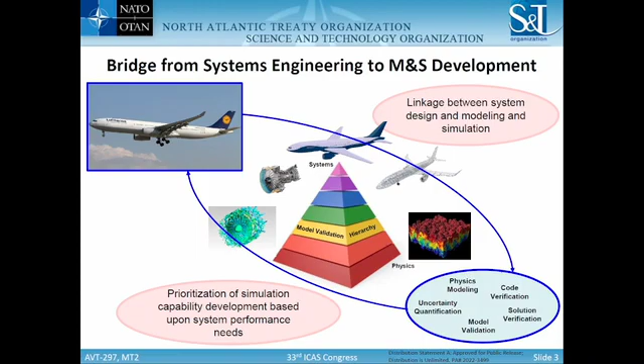So the validation hierarchy is one way to do this, where the linkage between the system design and the modeling and simulation is established. Of equal and possibly more importance is the prioritization of simulation capability development, and that's based on the system performance needs. So we're not putting these together for everything and anything that might ever happen. This is targeted work based on some system need that's got to be addressed, usually on a fixed time frame and budget.

So this is targeted work, as I said. The systems architecture and M&S linkages are established at the top. The systems design requirements focus is established at the top. Moving down the hierarchy corresponds to a deconstruction of element complexity. The sections of the hierarchy can have multiple tiers. The number of tiers is arbitrary, so you set that based on the problem you happen to be working.

Each tier can have multiple elements and sub-elements. You see some examples there of a couple elements on a tier, or one element that has a sub-element structure.

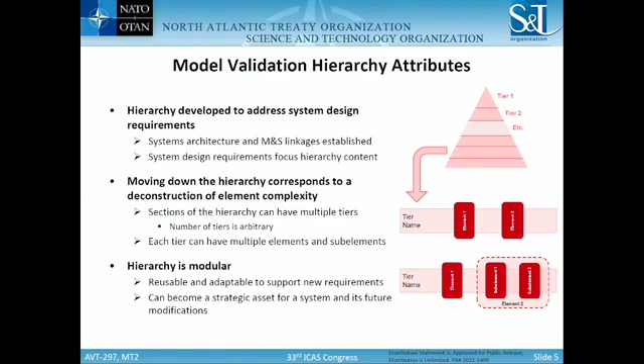We found that to be very advantageous to acknowledge just the way the physics are, and also to flatten the hierarchy. A final point that's very important is that this approach is modular. The hierarchy is reusable and adaptable to support new future requirements. It's put together, targeted based on some current requirement, but it can grow. You don't have to throw away what you've done. In this regard, it can become a strategic asset for a system and its future modifications.

Let's talk a little bit about conceptually the notional structure of the hierarchy.

Starting at the top, this shows the systems architecture. At the beginning, at the highest level, would be the systems architecture tier, which is usually a system of systems. We're going to look at how we drill down in the hierarchy, and I'm highlighting one element there with the blue outline for further analysis.

There can be any number of intermediate system tiers where you go from things like the full system, looking at the system, we identify some number of subsystems. This could continue on down as needed into components following traditional systems engineering thinking. But there will be a lowest systems architecture tier, and this will usually have a smaller number of tiers than you see in full systems engineering treatment, because the lowest tier is just what you need on that tier to introduce modeling, since this is a M&S, a model validation hierarchy.

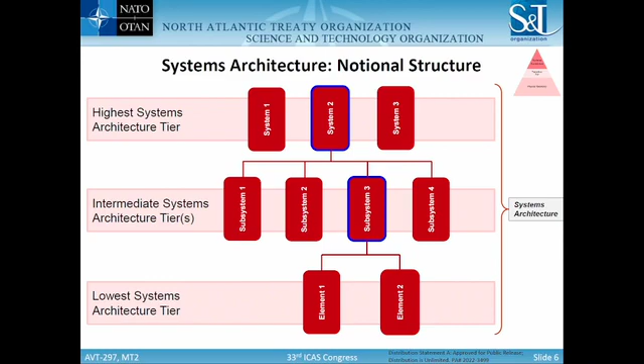This slide shows the notional construct of the transition tier. I'm highlighting one of the elements from the lowest systems architecture tier. At the next tier down, you see the transition tier, and this is where we show the element 1 modeling.

In this example, we allow for the possibility of there being, in this case, 3 disciplines that warrant separate modelings. Maybe one is fluid mechanics and one is solid mechanics. Each element would have its element modeling entry on the transition tier.

From the transition tier, if we look at the one modeling element that is circled there, I think that's discipline 2, we would start a physics taxonomy. I show the highest physics taxonomy tier. This would be where the most complex physics would reside for that particular sub-element on the transition tier, and there would be a taxonomy for each one of the entries on the transition tier.

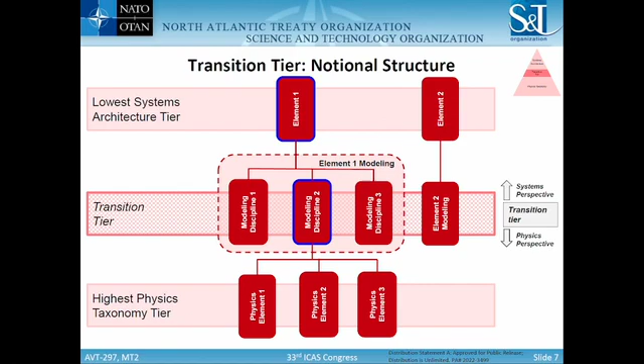Turning to the physics taxonomy notional structure at the bottom of the hierarchy, I've repeated the highest physics taxonomy tier. You can think of the most complex flows or the most complex electromagnetic interactions. We can pick one of those elements, and that will be primed.

That's demonstrated now at an intermediate physics taxonomy tier. This is where you start the physics-based deconstruction of the complex physics into intermediate level physics. There will be a number of these tiers which are problem dependent.

When you finally get to the lowest physics taxonomy tier, this is where your unit problems would show up. From my perspective, being an aerodynamicist, the unit problems, this is where we see things like a boundary layer on a flat plate, maybe with an oblique shock reflecting, things of that nature.

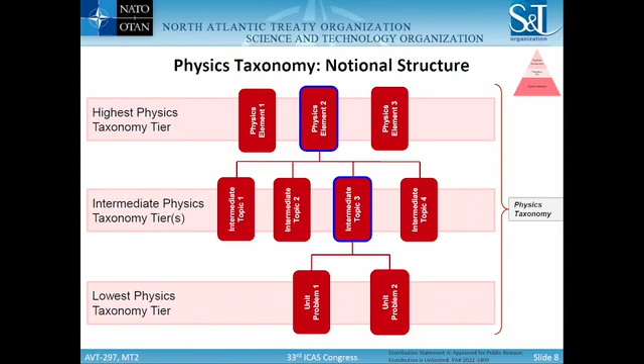The key thing is that all of this is connected explicitly from the full system down to the unit problems in the vertical direction through the model validation hierarchy.

There's another new concept that we developed in the course of doing this work in support of Joe's project, and that's the coupling element. Everybody knows that systems and subsystems are coupled, and really it's the coupled issues that can be quite challenging in this business of making viable airframes. For the model validation hierarchy, we introduced this notion of a coupling concept, shown as the diamond on the transition tier.

It's shown that it occurs between two element modelings. The one on the left has its physics taxonomy, the one on the right has its physics taxonomy, and the coupled modeling element would have its own physics taxonomy.

We've assessed this in many different ways in the NATO work. One way to think about it, even though this is a notional slide, if you thought of element 1 being an airframe, and you have airframe modeling in the transition tier, if element 2 were propulsion, you would have propulsion modeling on the right, and what would be in the middle is the propulsion airframe interaction modeling, PAI.

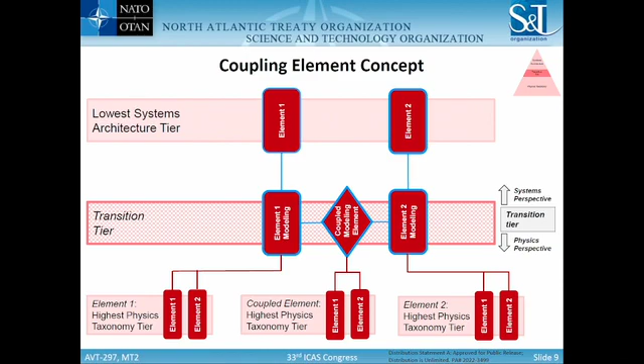PAI does specialized testing, they have specialized codes, they're going to have their own physics taxonomy, and it's connected in the lateral direction for a coupling element.

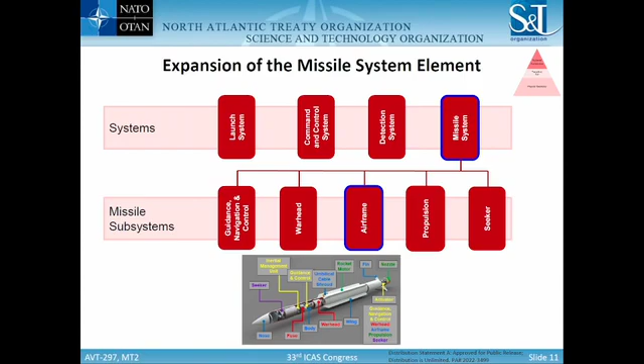Now in systems engineering, you would keep going, basically following the geometry and the parts. At some point, when you got to the bottom of that type of thinking, you've got washers, rivet counts, and things of that nature. We don't need to go that far. Actually, for a model validation hierarchy, you don't want to go that far. You only want to go down as far as you need to introduce the mathematical modeling. For this example, which is going to be based on aerodynamics, supersonic maneuver, this is all the further you need to go, because we're going to introduce modeling on the transition tier in the next chart, and we're going to focus on the missile.

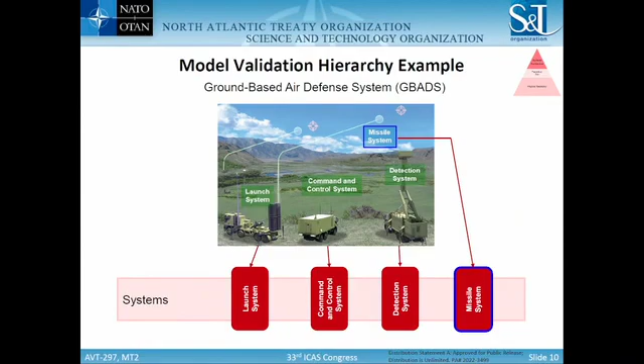Oops, I'm sorry, wrong button.

Okay, so for the missile, when we go to the transition tier, for the airframe, we're going to introduce airframe modeling. In this example, we have two disciplines to consider: aerodynamic modeling and structures modeling. This is fluid mechanics and solid mechanics. They'll each have their own physics taxonomy, and I'll show you a little bit about the aerodynamic modeling.

Here I've repeated the transition tier at the top with aerodynamic modeling, and I'm showing you what a physics taxonomy could look like for this application. For very complex flows, it's common practice in the aerodynamics community to consider the fundamental structures that we see in flows: shock waves, vortices, boundary layers, wakes, and jets. So we just chose that as the organizing principle for the complex flows for the aerodynamic modeling.

It's also common to have interest in unit interactions, how vortices interact with boundary layers, and so forth, so I'm showing that as a second application. Notionally, you could think of the interest, since this work is all targeted, the interest is going to be, say, supersonic maneuver. And you know the way missiles are, if you remember the picture, there's vortices all over the place, and they play a key role in how the vehicle maneuvers. So we chose that as an example.

The unit interactions, below those you can typically find canonical cases, and so on and so forth. An important thing here is that we've actually put this physics taxonomy together based on the way aerodynamicists work, and with this approach to a model validation hierarchy, you can do that. We put together a structures modeling physics taxonomy, and it'll be in the NATO reporting, and that's put together the way the structures discipline works. So this approach embraces the way the different discipline areas do their job, and we think that's a real strength of what we've done here. Everybody gets to work the way they're accustomed to working, but we have an approach that gets that all connected in the context of the model validation hierarchy and up to system performance needs.

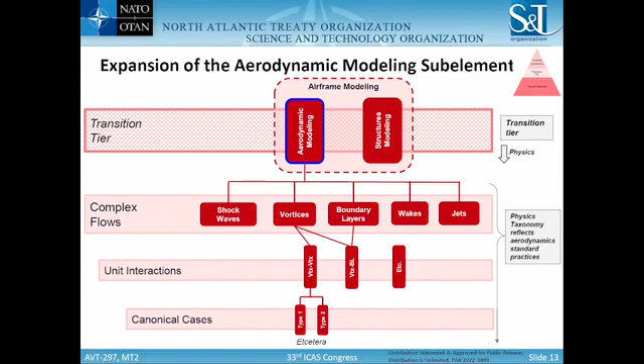Here's an example of coupling between the airframe modeling sub-elements. We've been focused on the airframe modeling. You see the aero modeling on the left, the structures modeling on the right. Each one of those would have their own physics taxonomy, as I've just mentioned. The diamond in this case shows the coupling between aerodynamics and structures, which we all know in this room is where aeroelasticity fits.

Aeroelasticity has its own discipline. It's going to have its own physics taxonomy, perhaps distinguishing static from dynamic. There are other ways to do it, specialized facilities and codes developed to address aeroelasticity. The point is that the coupling element is what enables these coupled interests to fit into this concept of a model validation hierarchy.

And we've worked this from all different levels. In the NATO report, we even have an example of coupling that originates from the system of systems level, between the launcher and the missile itself. You've got particulates and all sorts of different physics that show up. It doesn't matter - so far, it seems like this new concept of the coupling element just works.

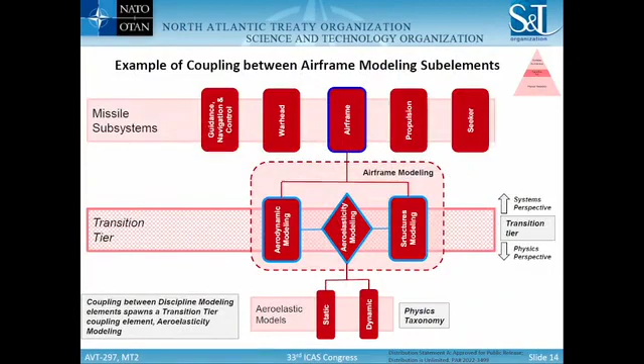Okay, so that's enough about the hierarchy itself. You've put this hierarchy together, targeted to address some system performance need that a program manager, say, is responsible for responding to. The next step, since you have the hierarchy, is to prioritize what's in it, so that you end up doing what will be the best work to address whatever the need is.

We've talked about creating the hierarchy itself. The prioritization here I'm showing has four elements. You create the hierarchy based on system needs. We next have created something we call a hierarchy element prioritization, or HELP table. This is where prioritization is done based on the importance of a particular validation hierarchy element to some system response quantity. Next, there's the creation of a gap analysis.

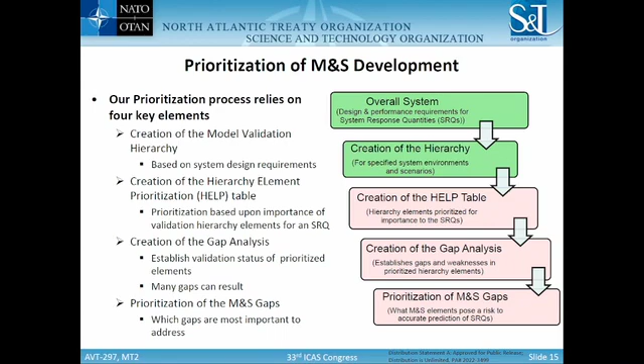This is where we establish the validation status for the various prioritized elements, and there can be a lot of them. So the final step is to prioritize those gaps - which ones are most important to work for the question that's on the table? And I'm going to summarize these a little bit.

For the HELP table, this shares a common philosophy with a prior process known as the Phenomena Identification and Ranking Table, or PIRT. PIRTs have been around a long time, and it's been my experience that not a lot of people in our business, in the aero business, are aware of this. PIRTs actually came out of the nuclear power safety side of the house.

They use M&S to help assure the safety of nuclear power plants, and they developed something called a PIRT to help guide their analysis and pick out what parts of their M&S are most important. We found that we could leverage almost all of the PIRT for our interests in terms of a model validation hierarchy. And there are four key features to the HELP table.

An environment and scenario under analysis are stipulated. For us, you could think of the environment as, say, normal operating conditions, and for the scenario, think about supersonic maneuver of this missile. You stipulate whatever it is that you're working on. There's a list of the hierarchy elements for assessment that are germane to that particular environment and scenario, listed there as A through F - those would be like vortex flows or shock waves or things like that.

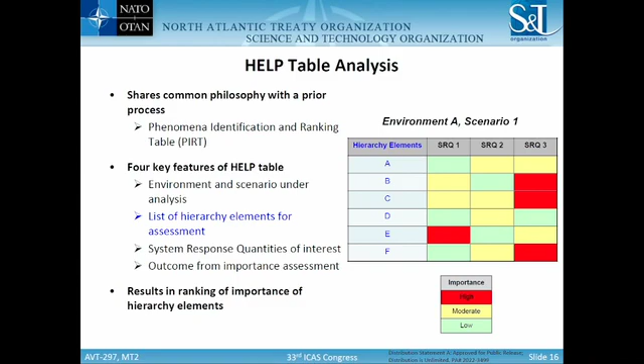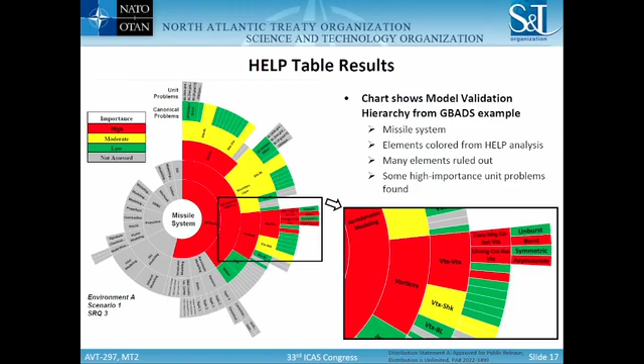So you can get a pretty quick snapshot of what the help table looks like. And you can see that out of what could be a lot of unit problems, you can narrow this down pretty quick to find the ones that seem to be important.

Next, the gap analysis is done. This also shares common philosophy with the prior process. The fellows that did the PIRT analysis did a gap analysis, and we found once again that we could leverage just about all of their work. It's been around for a while. There are just a few changes that we had to make to plug in the model validation hierarchy to their thinking.

5 key features. Each environment and scenario is stipulated across the top. I meant the supersonic maneuver. This is for SRQ3, say the rolling moment coefficient.

There's been a down select for the subset of the model validation hierarchy elements from the help table, so we only have 4 shown here. And then going across the top are the standard items that we need to assess the status of: the modeling, verification, validation, UQ.

And here we're assessing what do we know about our capability? Is it inadequate, unknown, or adequate? This starts to give you, for the targeted flow physics, what are the aspects of the simulation that you need to go after. Do you just need to get some verification done? Do you need to do a validation test? Maybe everything's okay and you just need to do some UQ.

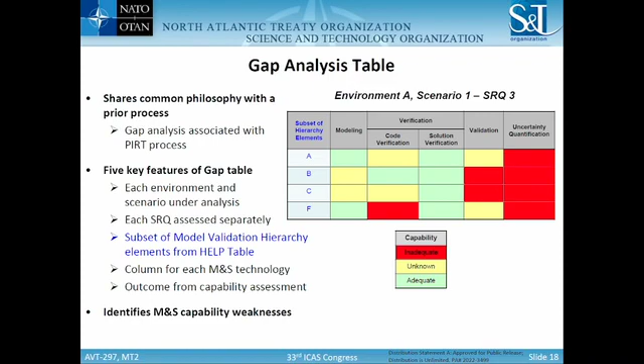So this identifies the M&S capability weaknesses. And then, of course, the next step is closing those gaps. These gap findings, the analysis identifies the high priority M&S elements, and the M&S elements themselves connect all the way back up to the top to the system design requirements. At least in my way of thinking, this is the point that you would probably report back to your program manager with what you've done, what you found.

There are going to be groups of SMEs, subject matter experts, that have helped you get to this point. And you can actually lay the whole thing out so that collectively you make a decision of what work is the most important to do. How does the schedule fit with the program needs? And do we have the money to do the right job? That can be a collective decision.

With the decisions made, gap closure work is pretty much the standard stuff: model validation experiments, improved numerical simulations, etc. And the gap closure impacts, the first one there is, I would also say, is fairly common.

Gap closure provides the enhanced M&S confidence at the level of the hierarchy that you worked at. Maybe that goes without saying, but I think you need to say it. The other thing, though, is that the model validation hierarchy could broaden the impact of this gap closure work that you did. Down at the bottom, the physics taxonomy,

it's got a lot of closely related physics right around the particular topic that you used. So you could be able to do a more well thought out assessment of the new technology, maybe a better turbulence model. You could look for changes in emergent properties. You could do a much more informed physics assessment of the new work.

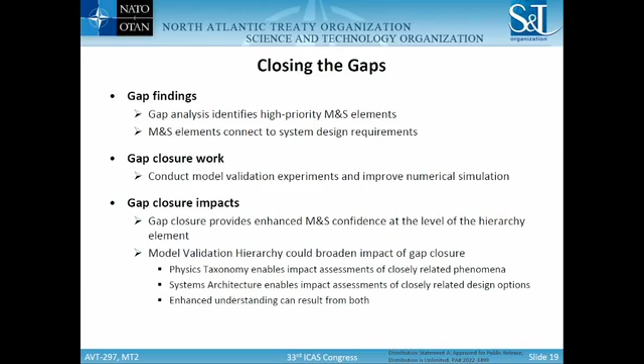At the top end, the systems architecture could enable impact assessments of closely related design options, which is more of a practical configuration level assessment of whatever this new turbulence model does. And it seemed to us, at least, that this could really enhance the understanding of what you did in this targeted piece of validation work.

So I think we can get more bang for the buck by exploiting the hierarchy in the ways I've described. Okay, concluding remarks.

This has been a significant extension to the model validation hierarchy that we developed. Bill was on our team. When you go back and read his book and look at the earlier charts, the basic ideas were there, but we've taken this quite a bit farther than what he published and others.

It's built on the general concept of deconstruction of complex systems. This allows system design requirements to be systematically connected with physics-based model validation features. And I think that's really important. You want to do this work on things that count, things that are important to the overall system and to the program managers you work with.

It connects systems architecture and physics taxonomy through a transition tier. That's something new. It accommodates coupling effects—also new. It accommodates discipline-specific conventions and practices, and I think that's critical. If you didn't do that, I don't think it would be used.

And this is robust. It can be applied to air, land, sea—I should have had space on there too—systems with diverse physics. I talk in terms of fluid mechanics and aerodynamics, but you can talk about anything. We could be doing electromagnetics, or space radiation on a capsule.

It doesn't matter. And to repeat a key point, this approach is modular. You start out putting a model validation hierarchy together to solve a specific interest for a specific problem, a specific program, a specific program manager, but you can reuse what you've got and just keep building it.

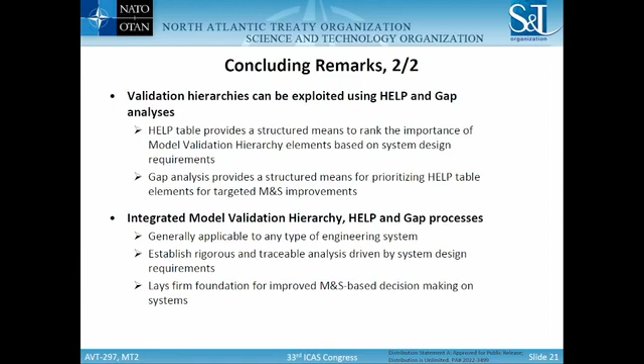The integrated model validation hierarchy, help, and gap processes are generally applicable to any type of engineering system. They establish rigorous and traceable analysis driven by system design requirements, and they lay a firm foundation for improved M&S-based decision-making on systems.

I'm going to go like one minute over because I can't leave acknowledgments out. You don't do work in a vacuum, and we've had diverse sponsorship for this work that's gone on for about 5 years. You see two NASA programs, the Transformational Tools and Technologies, and Advanced Air Transport Systems. We had a research branch.

We got support from the Air Force and from the NATO Science and Technology Organization. The call-outs—the most important one is to T-Cubed, as we call it. T-Cubed helped fund Bill Oberkampf. They supported my time to do this research, and they supported my ability to stand here, to come to this meeting and tell you about this work. Without T-Cubed, this would not have existed, and I appreciate the support we got through them very, very much.

Money and manpower is always tough. The Air Force Research Lab also funded Bill. We've had critical reviews from Jack Benek on this work. And of course, the NATO STO organization enabled the scientific collaboration for this project. So thank you—I'm about one minute fifteen over, but I appreciate it.

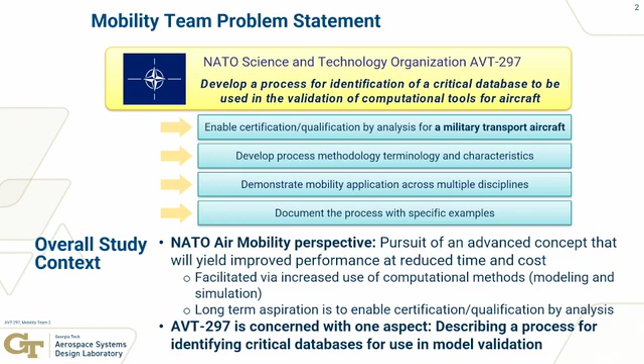Since we had to take a systems level perspective - and the reason for that is very obvious - sometimes something seems very important until you roll it up to the level of consequence, only to realize it was insignificant. The higher fidelity you build into those areas, the more complicated you make the problem. If you think of design, that's why we have conceptual design, preliminary design, and detailed design. A rib can easily have a million different permutations of just the rib itself, but I don't want to do that for every part, so I'm abstracting it as I'm moving up.

For instance, for a vehicle like this, I might be interested in: does it meet its range requirements? Is it free of flutter in the operational envelope, like Rob was presenting this morning with the VN diagram? Does it meet the takeoff and field length requirements, and the like?

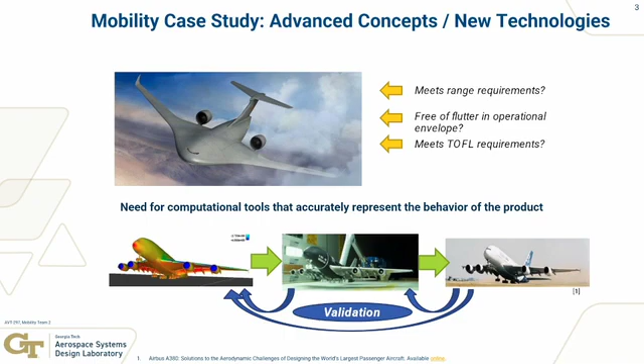Our portion of the exercise was the development and implementation of a methodology very similar to what Jim was presenting, that will contribute to the identification, quantification, and reduction - kind of like the UQ identified today - by certification by analysis as a desired state. In this case, what we're doing is trying to reduce epistemic uncertainty.

If the term is unfamiliar, uncertainty is usually classified under aleatory and epistemic. Aleatory is non-reducible, so usually you're talking about robust design and things of that nature. Epistemic uncertainty is more along the lines of lack of knowledge, which means the more I study the problem, the more iterations I do, the higher fidelity I go, eventually I have a chance of actually shrinking that distribution and de-risking a given problem.

The approach we took was founded in a model-based systems engineering approach. Of course, to do model-based, you have to do systems engineering, and all that is under the overall category of model-based engineering. It tries to draw on established engineering principles, because if they're not, people most likely will not use it - it will be too foreign to the processes they use.

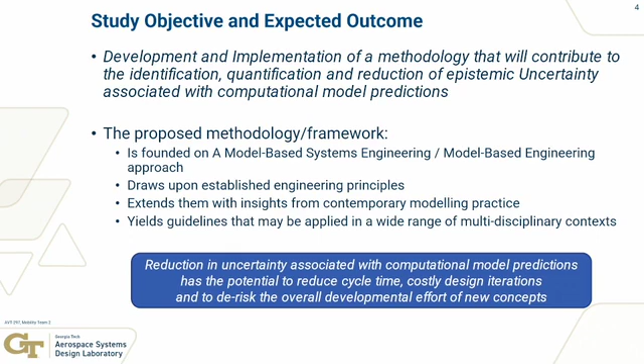And then it extends them with insights from contemporary modeling practices that, again, for people in the field are not particularly new, but if you've never seen them before, they might look novel. It yields guidelines that may be applied in a wide variety of multidisciplinary contexts - reduction in uncertainty associated with computational model predictions for the purpose of reducing cycle time, reducing costly design iterations, and de-risking the overall development of these new concepts.

For this presentation, I'm going to break it down into 4 portions: the decomposition of the problem, very similar to the ontology - and in fact it was identified this morning as a needed element, those ontologies - the development of the models for the purpose of our exercise, and then how we propagate those uncertainties for the purpose of identifying which uncertainties are the key ones to work on.

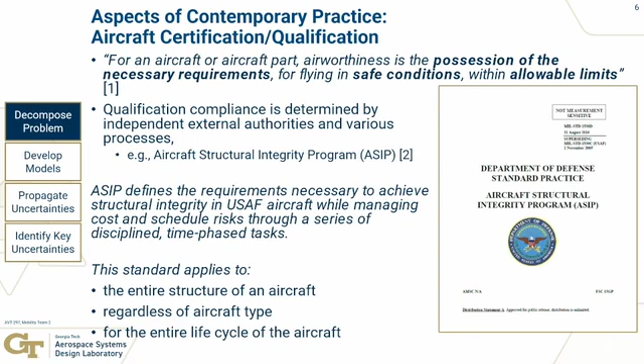So in this case, I'm using an example, the ASIP process for certification of aircraft. This is the Aircraft Structural Integrity Program. There is a document that describes the entire process. So from that document, I'm taking out the phases, the primary tasks that one has to perform to demonstrate that the vehicle is meeting the various criteria.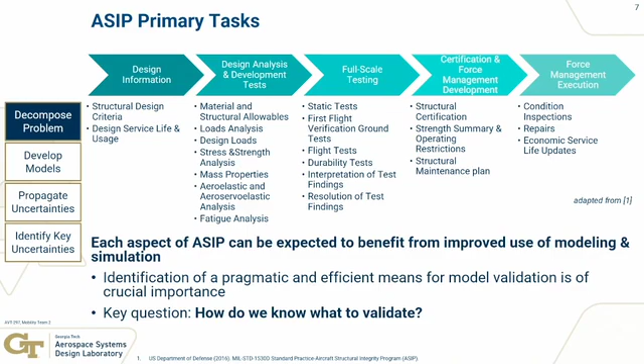So for each and every one of those things, I can either go and do the actual testing, or I can do some kind of an analysis. And before I commit to anything like this, I need to know whether the physics of the problem are well understood in order for me to do the analysis and de-risk the program. It's only when I feel that the analysis is not founded in the physics of the problem, I start deciding if I'm going to go to higher fidelity or highest fidelity, or if I'm going to do any physical tests. So the idea there is to be motivated by this context.

I mentioned systems engineering. For those of you who have never done any work in systems engineering, think of it like I have a set of requirements, and I need to flow them down and allocate them. So in this case, the same approach can be used where the allocation is along the lines of what analysis has to be performed, at what level, what tools, how much fidelity I want to build in those tools, and so forth. And that allocation implies that I have some kind of a quantitative approach on trading options.

I can do it this way or that way, and in the end, I can determine which direction to take. The functional decomposition is also there because in some cases, I haven't done the problem, so I don't know how to physically decompose it. It's not a derivative. Maybe I haven't done this before. So it's not uncommon, especially when people claim that they're innovating, to do a functional decomposition and then synthesize to come up with architectures that will solve that problem.

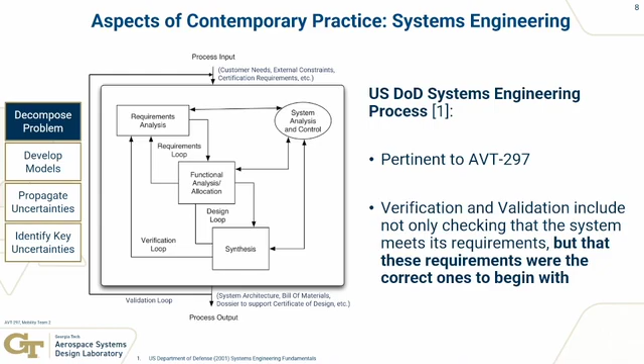So we left it open enough. As I said, it's a framework. A framework implies that the answer in the end is not a specific outcome or result. It is a place that has all the necessary hooks to do some use cases. The next person comes along, adds more use cases, and eventually you have a library that can do all of the above.

Now, Joe did mention, as he was giving a quick prelude of how the various teams were proceeding, our decomposition is very similar to Jim's. It's, of course, viewed a little bit different here in this diagram. But you always start with what it is that you're trying to do, identification of the requirements from the documents that I was just referring to. For example, for the example that we were talking, that was a relevant document.

And then in our case, we're going to break it down into a mission decomposition. Tell me what mission you're trying to perform and at what mission segment you are. That's one piece of information that you need.

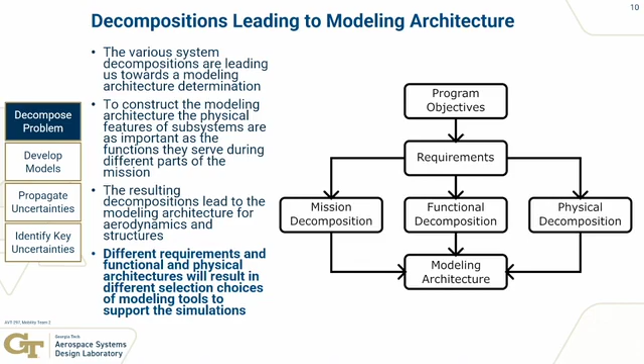If you think of your modeling, you always need some geometry, and you need conditions and so forth. The intent is to link it directly to those elements, so let me just show you side by side the two perspectives.

In the function decomposition, you have an arrangement of functions with sub-functions and interfaces. We decomposed this for the C5. At the bottom you see a mission profile—the idea is you move segment by segment, asking what am I doing at this step, what am I doing at this step.

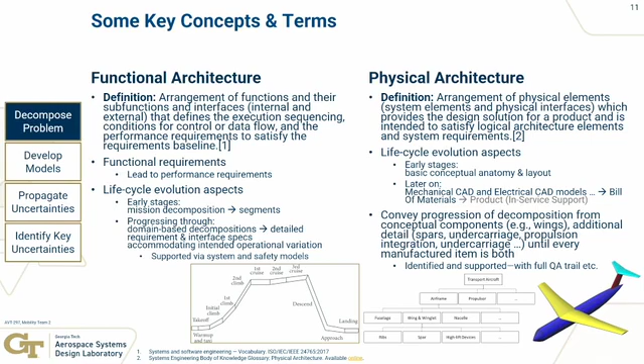And on the right-hand side, similar to what Jim was showing, we see a decomposition of a vehicle. In this case it has the elements of a transport cargo type of military asset, so it looks like a C5.

Then you go into the overall decomposition of the problem, similar to the taxonomy that was shown. We also have a demarcation point—once you've done your decomposition a la systems engineering, now you need to think about the process, how will I analyze those things.

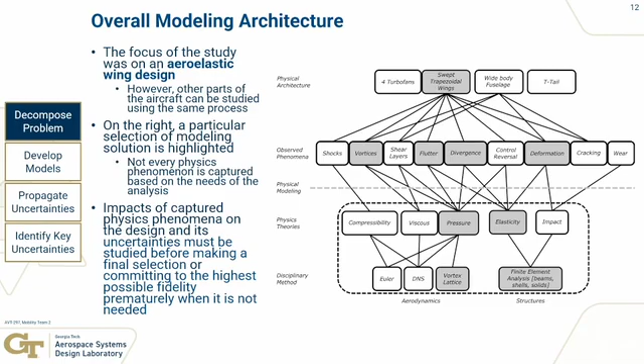At the top is the physics you're trying to capture as it pertains to a specific element. One level below, you have the disciplinary methods you might use, and one level below that, every entity codifies those into tools—a specific code preferred depending on the level of sophistication and the physics someone wants to use.

So to put it into use here, for the C5 model we're going to pick up a baseline C5—it's the C5A, a little bit older generation C5—and we're going to model it.

Within that modeling, we're going to build an environment for the purpose of quantifying uncertainties and propagating them. We're going to try to tackle what happens if you have couplings, like Jim was saying—if you have a coupling between aero and structures, what will that do to the answer, what does that do to my remaining uncertainty and the like.

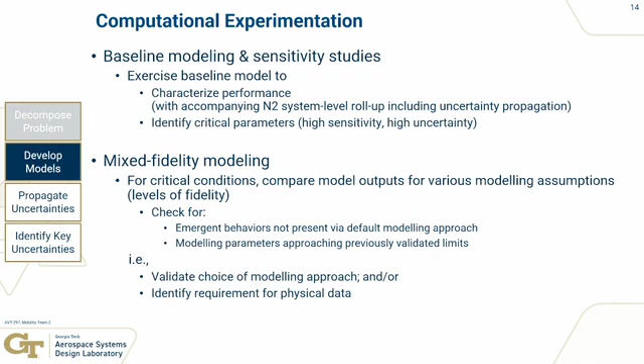The intent there is to try things of mixed fidelity modeling—if I had this coupled or not, if I include this analysis or not, do I have ways of quantifying what that impact will be. So you start by putting together a multidisciplinary analysis environment, starting with the mission, the geometry, and the various disciplines we tackled.

In principle the environment was integrated, so we could have done propulsion and other things, but in this case propulsion is uncoupled. Of course the airplane needs an engine, so there is the engine's model for the C5. Then we have the aero and structures, and the aeroelasticity is that coupling between the two—so the coupling between aero and structures gives us the aeroelasticity.

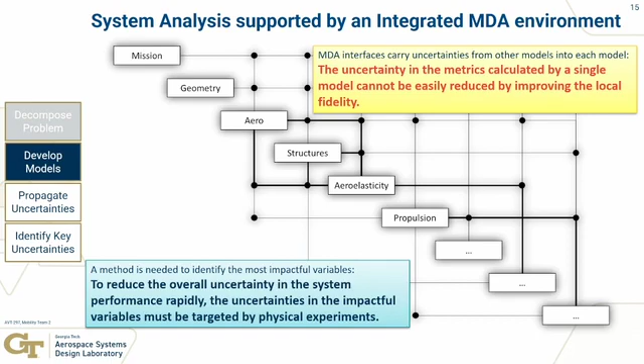We're trying to reduce the overall uncertainty in the system performance, and we want to see exactly how that happened—where did it come from, what were the contributions, and the like. So this n-squared diagram that we had before manifests itself into an integrated environment.

In this case we didn't have to start from scratch and stitch all our codes together—our lab has done this activity in support of other programs within the Air Force and NASA. The environment is called RAID, and it has a little depiction over there. Some elements are commercially available tools, others are homemade tools, and you have a geometry that you interface with all the tools.

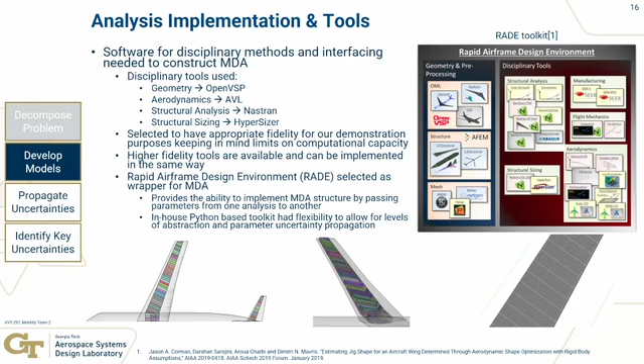In this case, I wouldn't say this is high fidelity—it's more mid-fidelity, just for demonstration purposes. The idea is that when you see something you don't believe is capturing the physics accurately, you drop down one level below in sophistication. That same n-squared diagram is then presented here as an XDSM, a design structure matrix, showing the information being exchanged between the various modules.

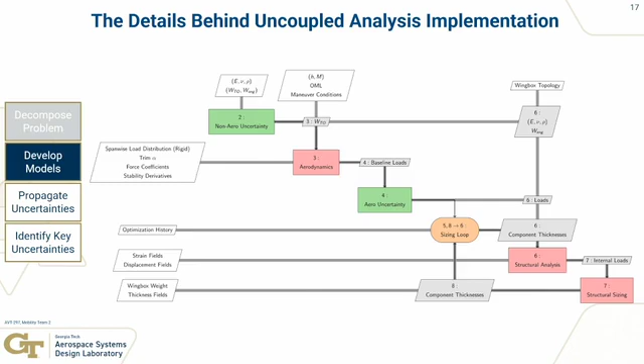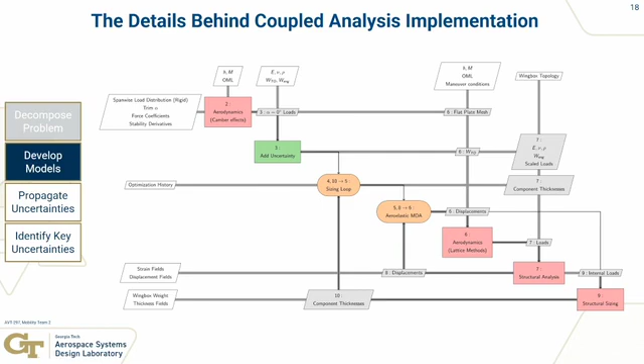In this case, it's the uncoupled one, where the aero and the structures are not coupled together. In the next one, they're actually coupled together, so you're accounting for the deflections and so forth. It was done both ways, and in the end we're going to try to see the impact that those things had. Then we went through a little verification just to make sure the models were working properly.

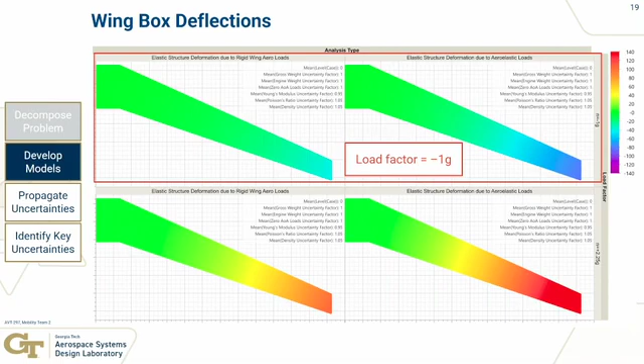So you have the wing box deflection for, in this case, minus 1G and 2.25 Gs. Then we did a design of experiments trying different conditions, testing the aeroelastic versus non-aeroelastic cases.

Once we felt we had enough of a model, we started structuring the framework to assess uncertainty, trying to find at what places you envision epistemic uncertainty entering. Early on, before you commit to the analysis, you can easily change the ranges of error from that analysis to see how sensitive the outcome will be, and that gives you guidance on how to proceed.

In trying to formulate it this way, we wanted to decide what the uncertainty parameters would be. Usually they're disciplinary metrics, and we needed a way of sampling it, driving towards doing some kind of probabilistic analysis on this.

Because these analyses tend to be rather cumbersome and take quite a bit of time to run, you want to speed up those processes. So the idea here is that you run a design of experiments around the integrated environment to generate the necessary data to surrogate it, creating surrogate models—either neural nets or some similar technique. Those surrogates are so fast to use that you can manipulate them very quickly to do either inverse design problems or probabilistics.

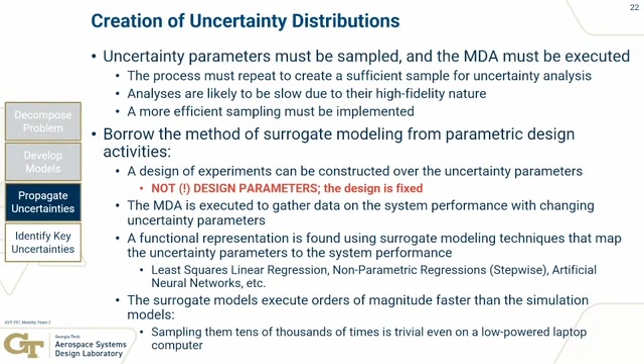The attempt here was to have an environment that the team can come together in, where someone can make a decision on the fly and see how the results differ. Also, sometimes because of the objectives, there's not just one objective—there are multiple objectives, and the weightings are not a priori known to the designer. You almost want to leave that degree of freedom to a review team that decides the emphasis they want to put on the various criteria. So it was built with that mentality in mind, that some kind of interactive parametric environment might be desired.

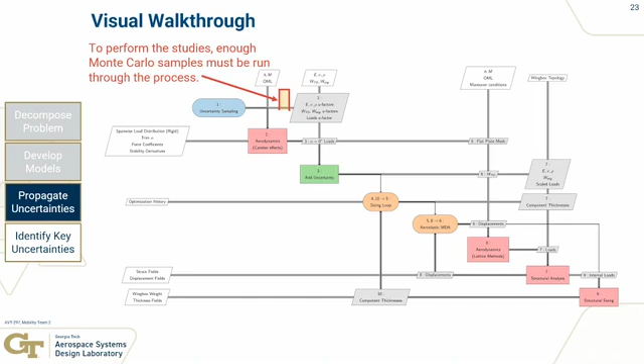So that's a visual walkthrough of how this is working. Here is our XDSM. I want to perform studies by sampling the range within which I'm varying a given process. The process takes a few hours to complete.

So if I had 1,000 samples per uncertainty factor, that would be about 2 years—of course, that's on a specific machine. If I had a cluster or cloud computing or whatever, it might be different, but just for reference purposes it gives you a perspective. And in many cases, 1,000 samples might be too little. If I'm interested in things in the tails of distributions, I might need hundreds of thousands or a million calculations.

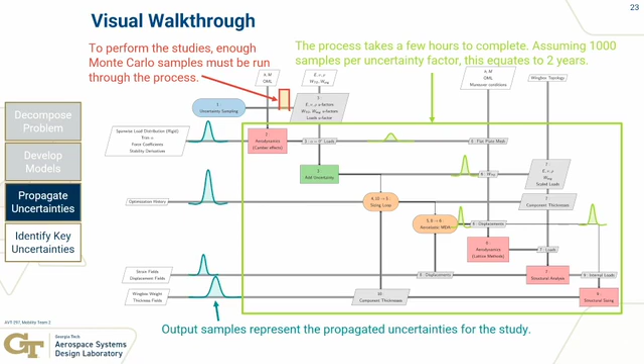So the idea is to propagate them through, and every time I have a feedback, now I have a probability on top of a probability. But the intent is, at every level, to figure out how much variability I'm getting from that step. So when Joe and Jim mentioned rolling it up to the system level, that's exactly what it is—I want to get to the point of consequence to find if those things really matter. And if they don't matter, even though I might have a 10% uncertainty, by the time I get to the top it might be 1%, so maybe I don't care about that 10%. I want to care about the ones where a small perturbation leads to great results.

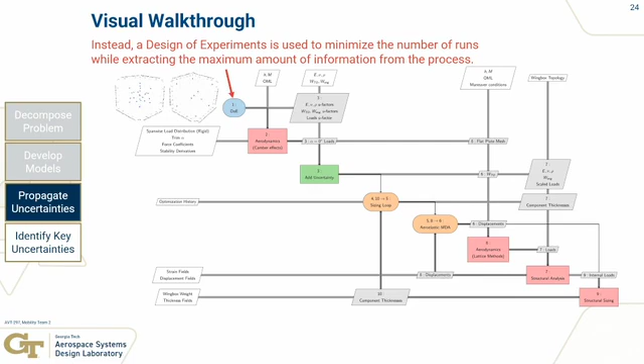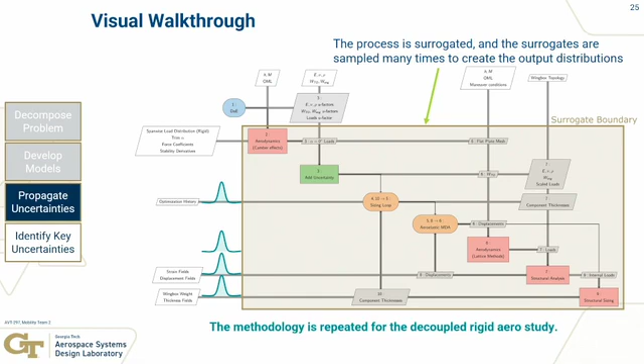So we did a design of experiments around that problem to speed up those processes. The Monte Carlo is actually done on surrogates rather than on the actual codes—imagine a design of experiments around the entire analysis. In this case, we tried a neural net representation for every response we were tracking and every constraint we were tracking. Then, with that capability, I can very quickly do a Monte Carlo and speed up those processes.

So now I have the framework running, and I have the surrogates so I can operate on, so I can see what kinds of results I can get.

Well, for starters, I can do parametric sensitivity. In this case, the horizontal rows are different things I'm tracking, and I can do this at every level. In fact, we're interlinking them so I can cascade them and look at them at every level. At the bottom, I have key parameters. These might not be geometries anymore, but disciplinary metrics that might have a little bit of a play.

Right now I'm showing it to you as a PowerPoint slide, but in reality this is something you put up on your laptop or project on a screen. Those hairlines, if you touch them and move them, it automatically updates the numbers on the vertical axis. So it's like a calculator.

And then of course it shows me the sensitivity. As I'm doing the sensitivity, it automatically shows that this is true when all the other variables are fixed at a given value. You fix the other values, and those things move up and down.

The first one has a little wiggle, which automatically tells me that something in my modeling didn't go well. So it's also a debugging tool of sorts. Someone mentioned today, I think it was Rob, that when you see some of your data, you realize that something wasn't working right. So this is another byproduct of the formulation, helping me debug those things.

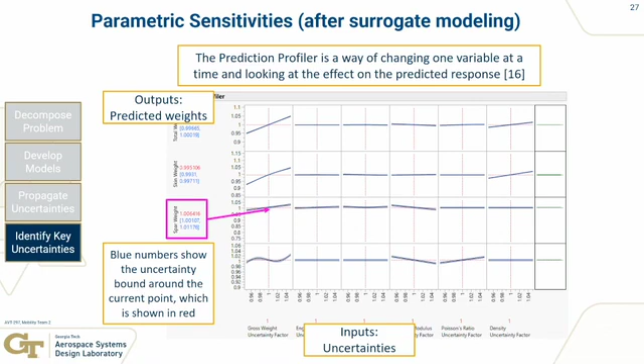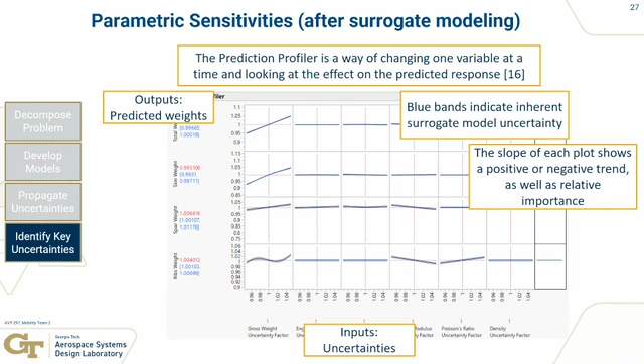So I have predicted results. The blue numbers show the uncertainty bound around the current point, so in a sense they're like 3 lines on top of each other, sometimes with error bars. It shows me how much error was introduced by the fact that I was creating a surrogate of a model, like a model of a model. The blue bands indicate this, and the slope of each plot shows a positive or negative trend, as well as a relative importance.

Once I have this formulation, I can drop down into a gallery of distributions. In this case, it shows a uniform distribution, meaning I'm a little bit agnostic as to whether there's a central tendency or bias in the shape function. So uniform distribution is almost like a random number generator within that range.

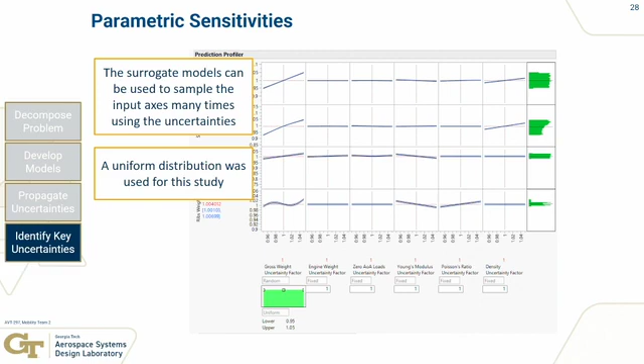Then literally you run 10,000 cases just by snapping your finger, and you get the probability distributions on the right-hand side. That's a sense of how much uncertainty, in this case for this example, one thing is varying while the other things are fixed at values.

Then I can come in and say, okay, if it's not a uniform distribution, what is it? Do I have any prior knowledge of this thing from prior investigations? You change on the fly what that shape function is going to be. And of course, in this case, we're just doing 1-to-1. I can change the values of the other ones to bracket the whole thing.

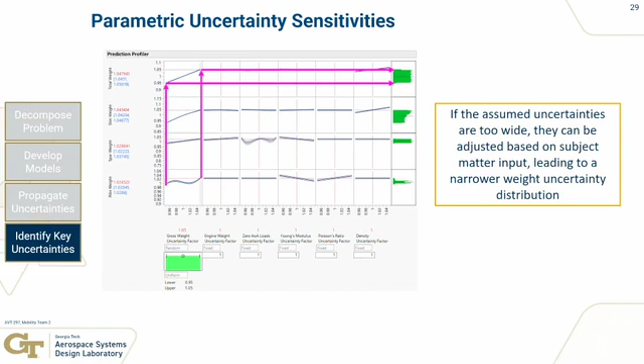If the uncertainties are too wide, it can be adjusted based on subject matter expertise. If that indeed is the range, then I know that variable has a big impact and I have to pay attention, or find ways of reducing it, compared to another one where the range was narrowed. As you're narrowing the range, it also narrows the distribution at the top level.

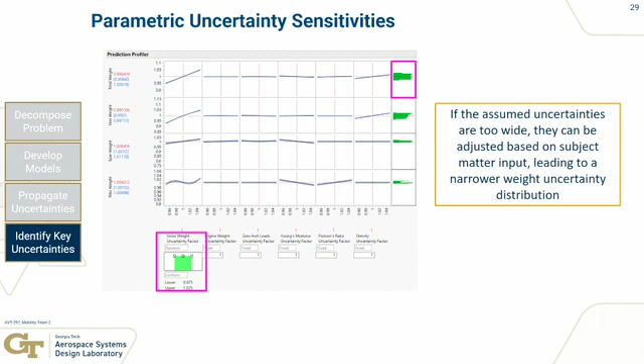Again, this is just one variable. In reality, I have to do this for each and every one of those variables, eventually doing it for all of them, and then quantify the results associated with that formulation.

I also have the ability to change values of fixed uncertainties and see how much of an impact they have. So you see I'm doing it by changing the value. It changes the distribution and shifts the trends.

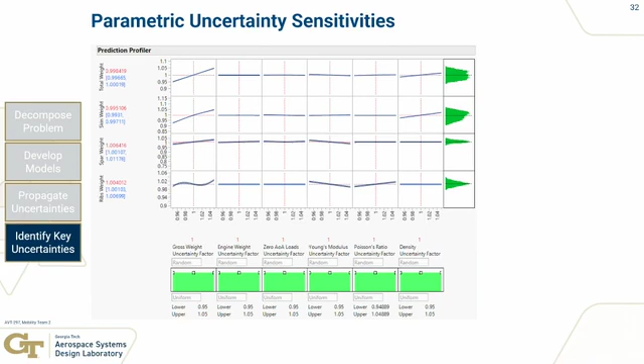At that point, I can extract this information and send it over for further statistical analysis. Since I have equations, I can even solve this numerically.

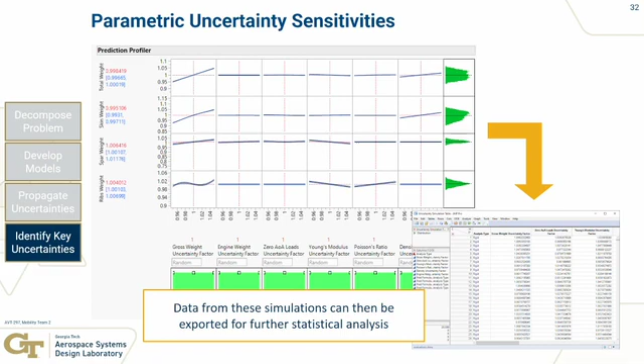The next step is to do it with the addition of a coupling, so we're going to do this aeroelastic analysis. If you look at the very first column, it has a categorical variable that toggles between doing a rigid or an aeroelastic formulation. When you move it from one to the other, it loads all the equations associated with that mode.

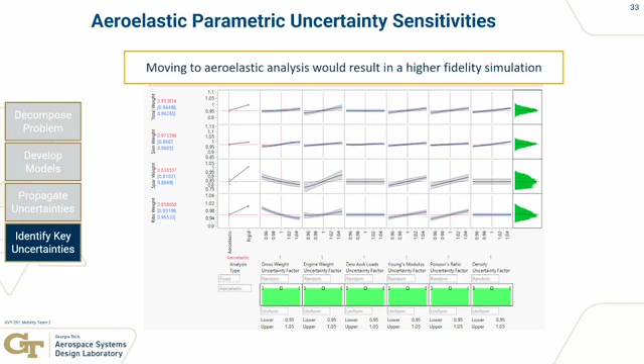If I do it that way, it could be viewed like I added fidelity, or I believed the phenomenon was worth capturing and didn't take the shortcut, I did it the right way. So if I toggle between the two, I see the impact of before and after, with and without. And if I superimpose them, I can see if there is a shift in the distribution or if the variability has narrowed.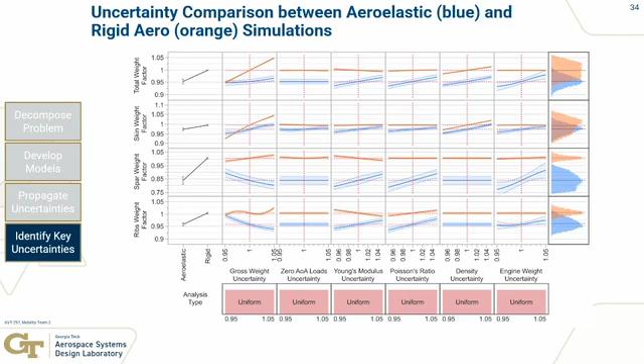So I have this ability of moving in all directions and trying all these different perspectives. Now, we did advertise that eventually we want to propagate this all the way to the top level. Right now we have gone to the lowest level for this demonstration.

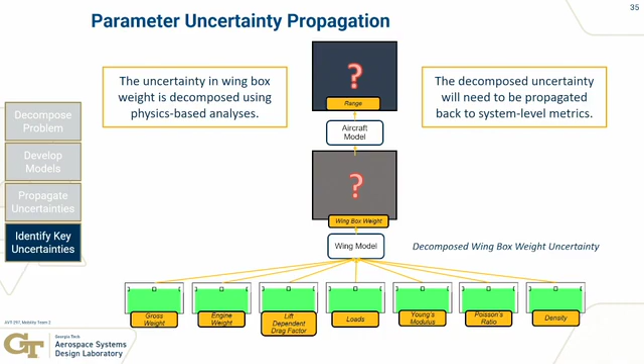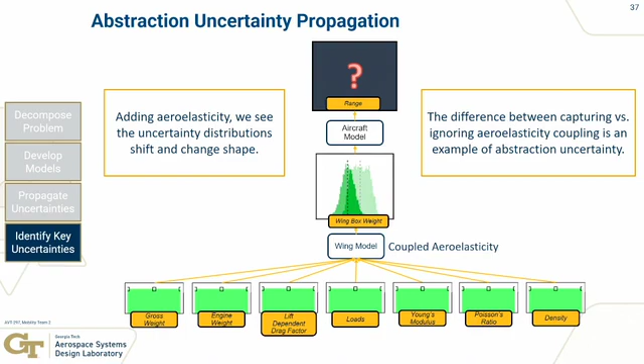Right now all those things are feeding into the wing, and then you're trying to figure out what that distribution is. You're doing this decoupled, and then coupled, so you can see back and forth what impact it has at that level. There is a shift and there is some kind of distribution, and now you need to propagate it one level above.

In this case, we linked it directly with an aircraft sizing and synthesis tool, so it's propulsion plus mission plus the overall behavior of the vehicle. Now the rows are actually top-level requirements, and you're trying to see what this impact will be at that level. Again, similar format, sensitivities.

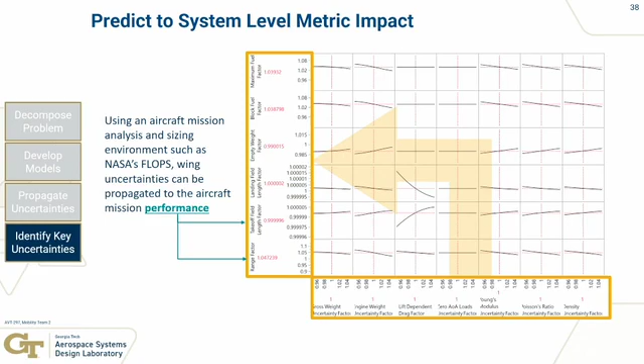Those two things are interlinked, so as you're maneuvering and manipulating them, they cascade through, and you can very easily see the impact it has at every level. So just like before, now I have distributions, not at the wing level, but all the way at the vehicle level for the things that I track.

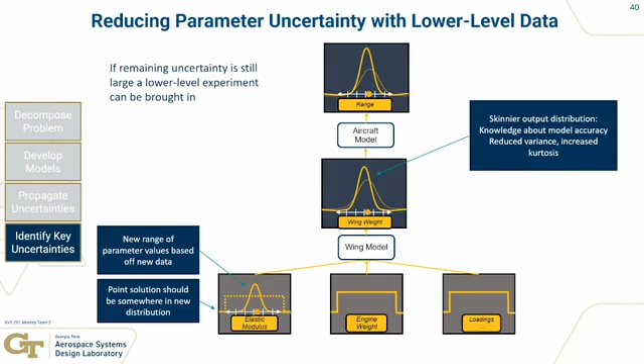In a sense, now I'm going from the wing directly into the top level, and some of the things we were tracking would be the range, the takeoff field length, and things of that nature. Of course, you can pick a point, and just like we did before, you can show the impact of aeroelastic versus rigid aero, not just at the wing, but all the way to the top, at the things you track. If the variability is too much, you keep on going.

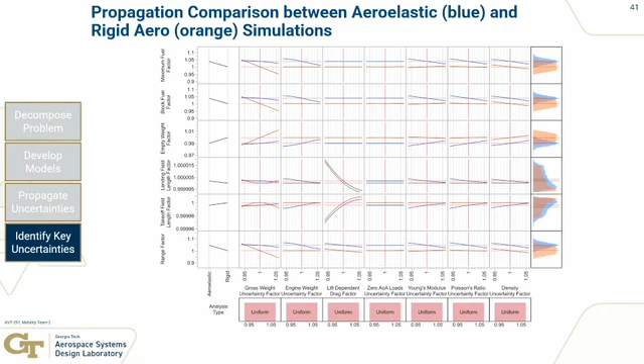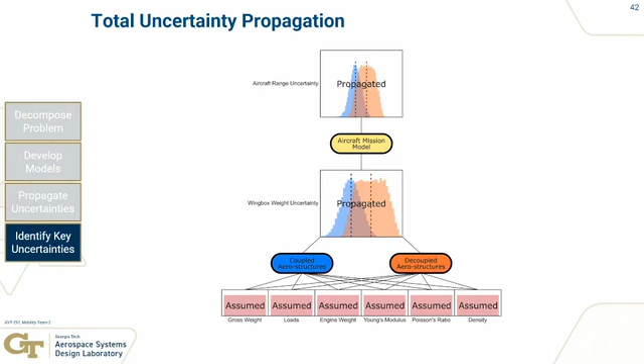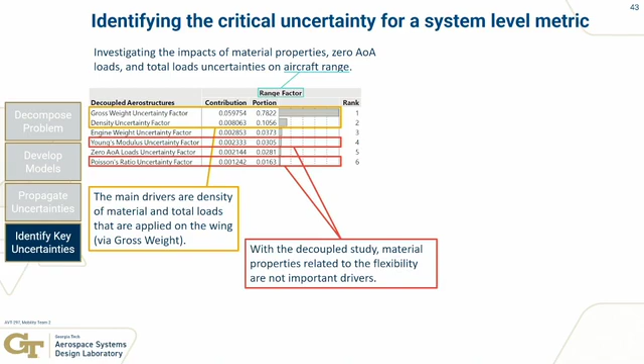That would be a depiction of that cascading and interlinkage. So when I decide what it is that I want to go do next, I'm always looking at what these distributions will look like. I can do an analysis of variance to see, within the ranges that I'm varying, who are the biggest contributors. In this case, we did it both for the decoupled and the aeroelastic one, and you can see the relevance or importance was different between the two.

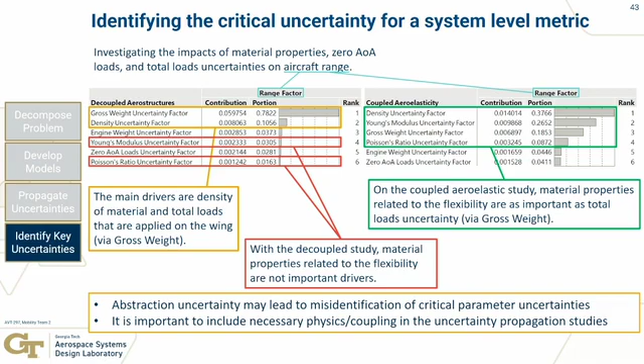That gives me some guidance, and now I can turn around and give guidance to my experimenters on what it is that I'm looking for. Because if you think of it, a TRL doesn't improve the value of the metric, it actually shrinks its distribution, so it's a de-risking activity. You're trying to figure out what experiment they need to perform in order for them to zero in on a specific uncertainty.

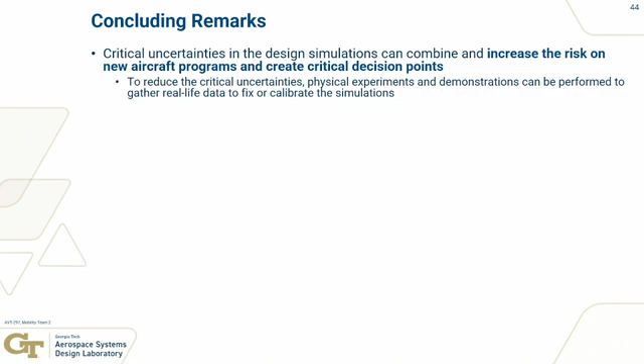So in closing, we tried to capture a methodology on how critical uncertainties in these design simulations can be combined, increase the risk on new aircraft programs, and create critical decision points. We're trying to reduce all those, and we're trying to avoid physical experiments. So we're trying to develop an environment that will allow us to give some guidance into the process.

If at the end the physics are well understood, I'm going to rely more and more on computational methods, and that hopefully will go very much in line with what the certification by analysis friends of ours were talking about this morning. In the case where the physics are not well understood, then I have to go off now and guide the process.

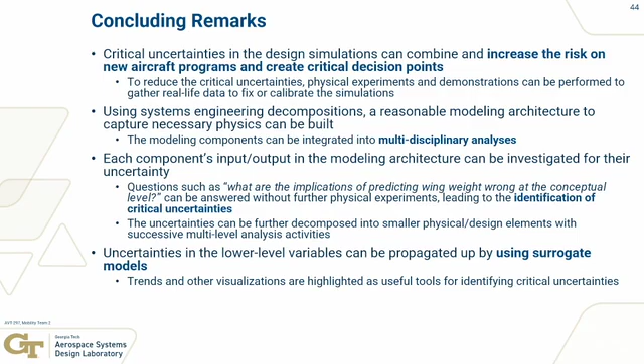And because I cannot afford to do every test, I'm going to try to zero in on the identification of the most critical uncertainties and build upon them. And the framework is driven by the fact that I can speed up processes now. And if I can run many, many cases and collect all my assumptions, my inputs and the outputs, then I don't have inputs and outputs anymore. I have vectors of data, and I can very easily solve inverse problems.